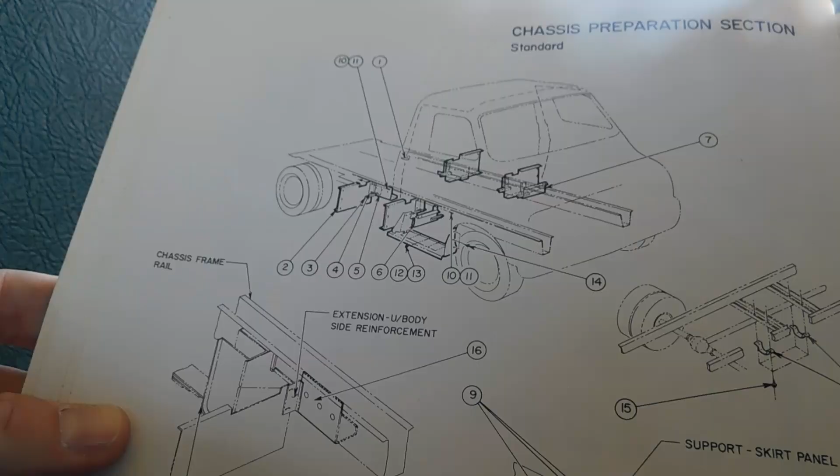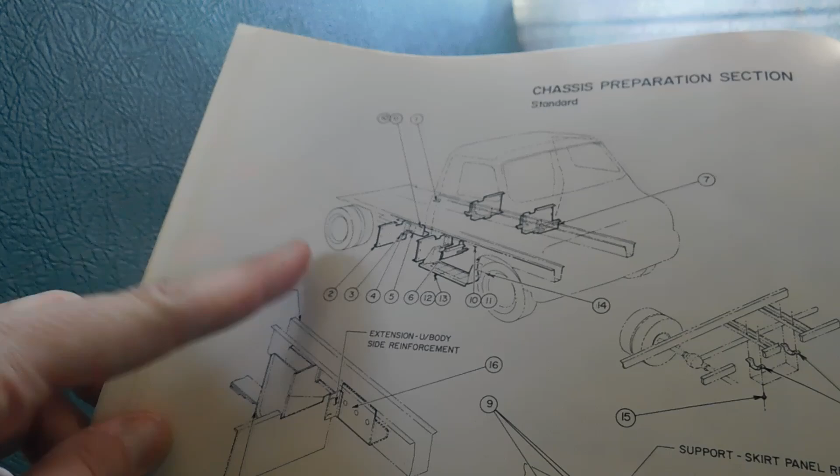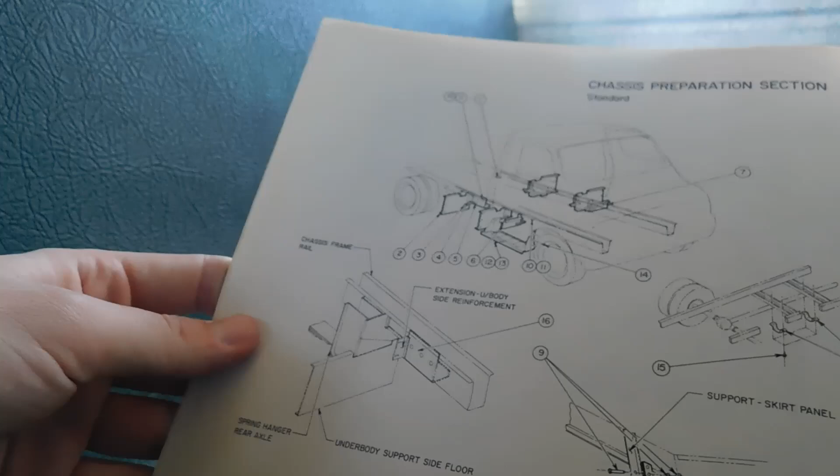So the first thing we're going to look at here is a diagram for the chassis preparation section. So this is just showing you the actual van chassis. You can see right here, this is the entire van chassis, and it's showing you the different points of the chassis.

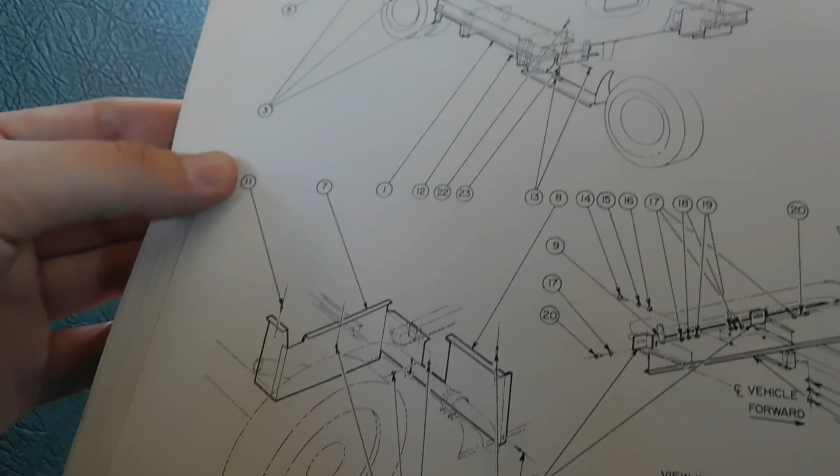And stuff that needed to be done to get it ready to mount the body. Then if we flip the page, we've got an underbody panels and heat shield section. So this is kind of cool, just another shot of the chassis and the different parts of it to show, since it's a parts book.

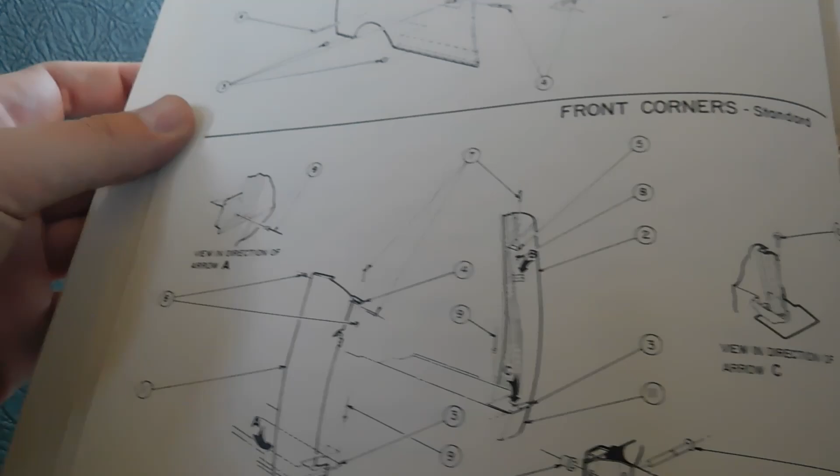Next, we've got a side panel view. So these are the side panels of the bus. And then we've got the front corners of the body, as you can see there. Then we have the rear end section right here. So it looks like this rear end section doesn't have windows.

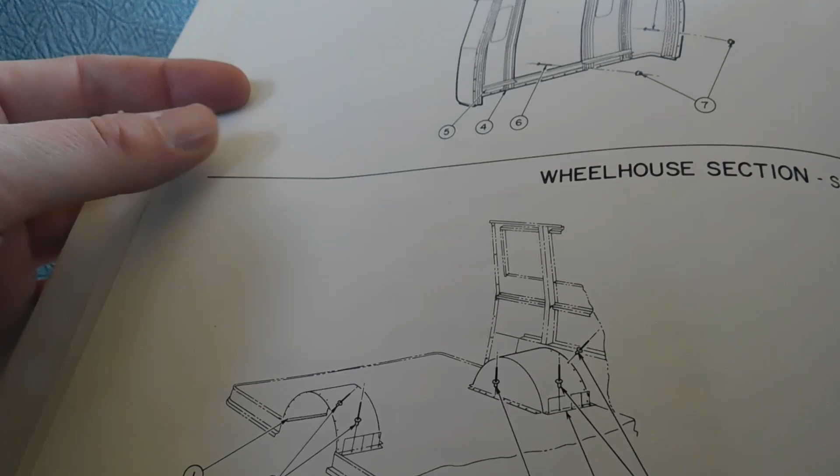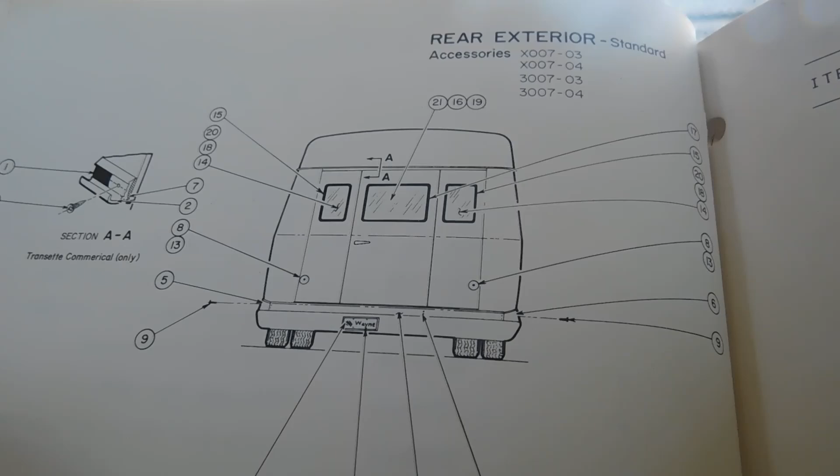That's your view of the rear end section. Underneath, we've got the wheelhouse section of the body. And then we've got the rear exterior. So there's your exterior shot of the back of a Busette. And then we've got the rear interior shot of the Busette.

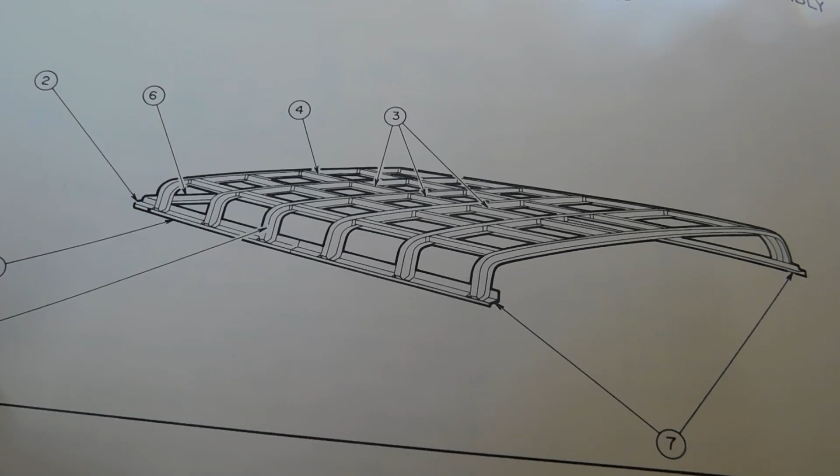Right here, we've got the roof frame assembly. So there's your look at what the Busette roof frame would have looked like. And then, let's see, roof assembly continued. This is just showing you the caps and the topping sheets for the roof assembly, and how they would go together.

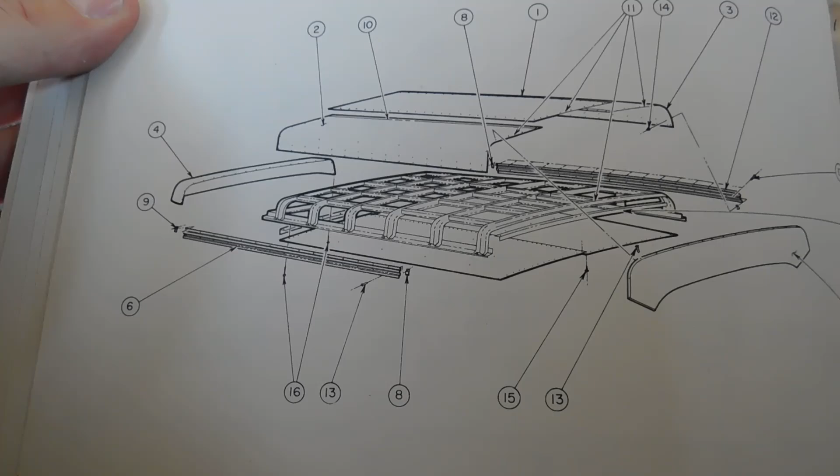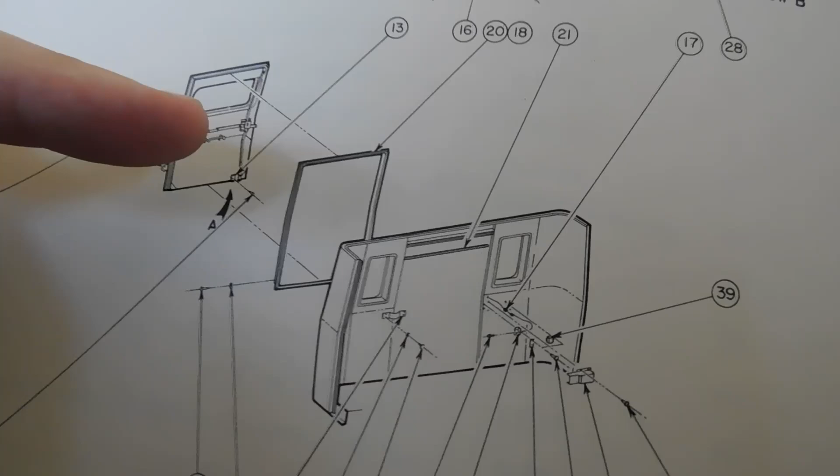Next, we've got a door. So this would be the single rear door, because you get an option as a single door or a double door. So there's your single rear door. Then we've got just continuation of the diagrams of the doors and how they would go together. There's your look at the door frame, and then the back of the bus.

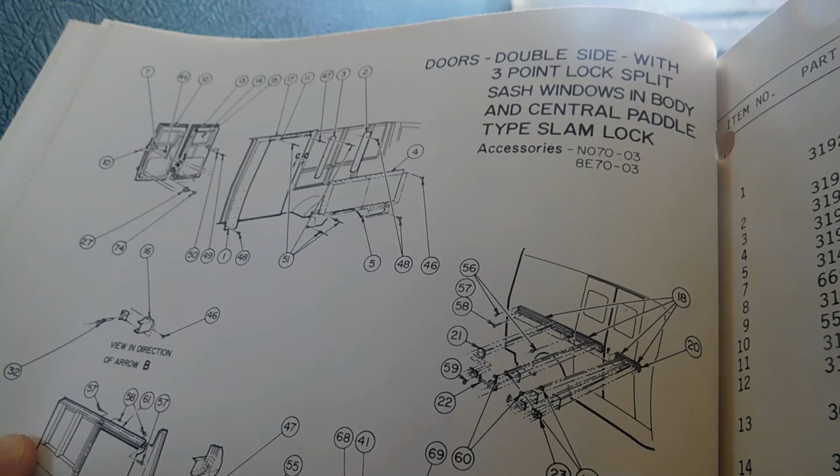So this one's kind of interesting. You've got the double side, let's see, 3-point lock split sash windows in body and central paddle type slam lock. That was a mouthful.

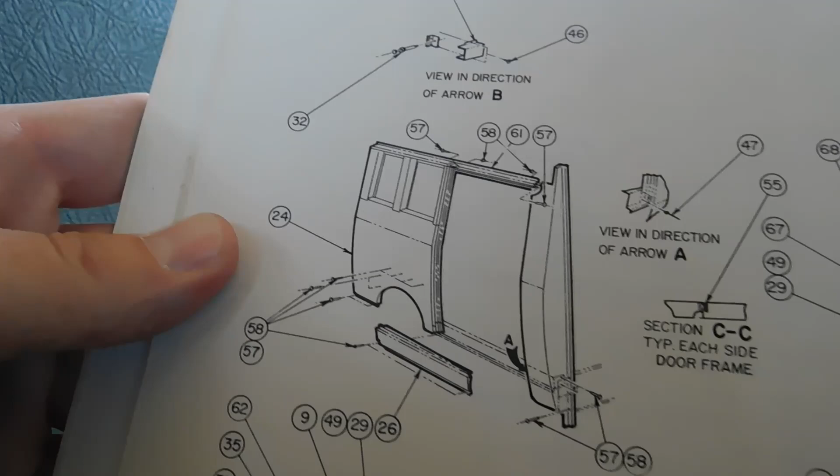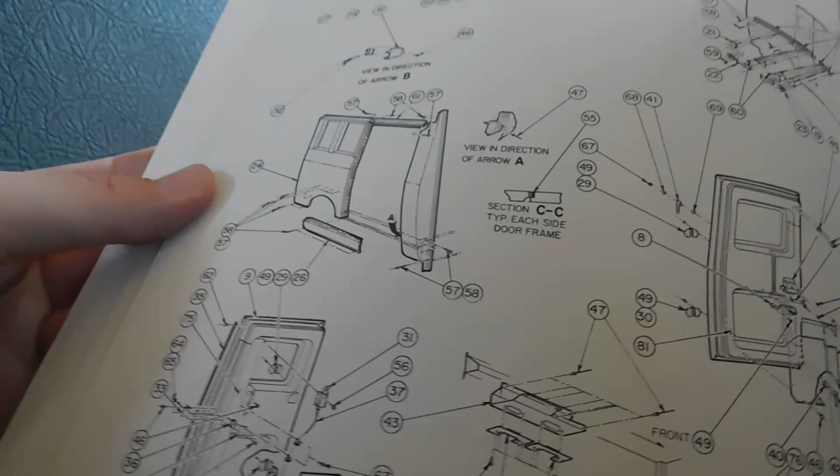But you got your double door diagram. There's the side body of the bus, and this would be for like a lift door. So there's your side panel, there's your lift opening for the doors, there's your look at the door mechanisms.

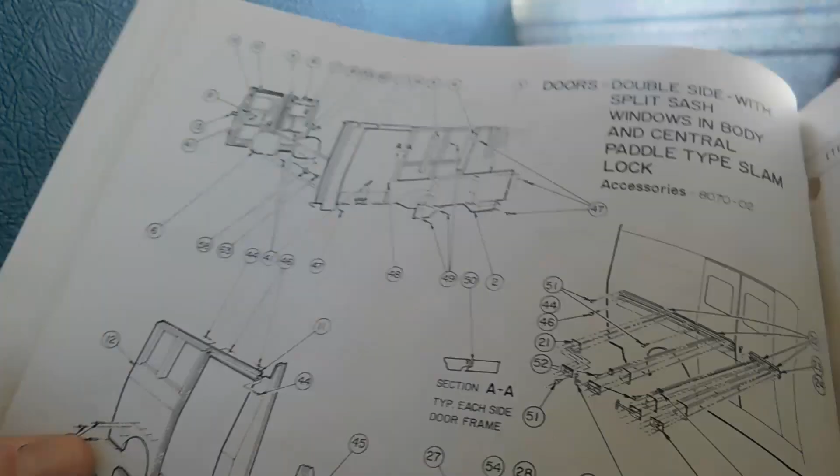That probably is a rear door, it's got what looks to be 2 windows, but this is probably a side door for the wheelchair lift. And this is just another option for the side of the bus. I think this is a singular door instead of 2, or it's a variation of the double doors for the wheelchair lift.

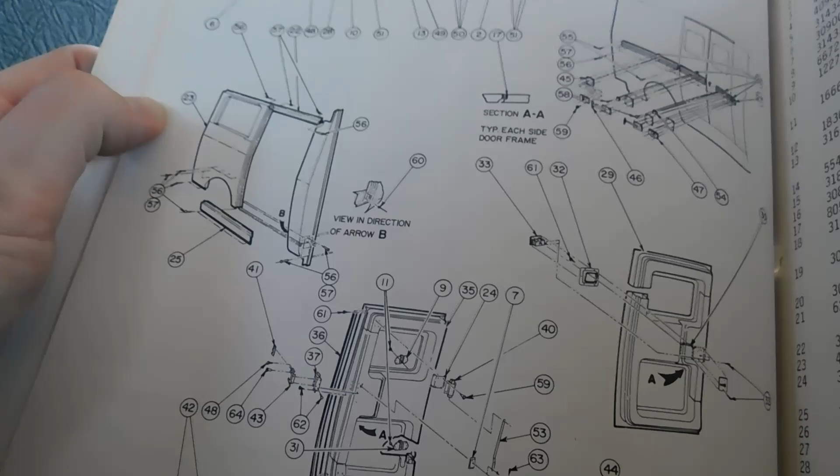And this is another page of the side double doors. Looks like this is a different body setup though, so that's a little bit different. But yeah, that's 3 versions of that. Next we've got an exterior shot of a Busette.

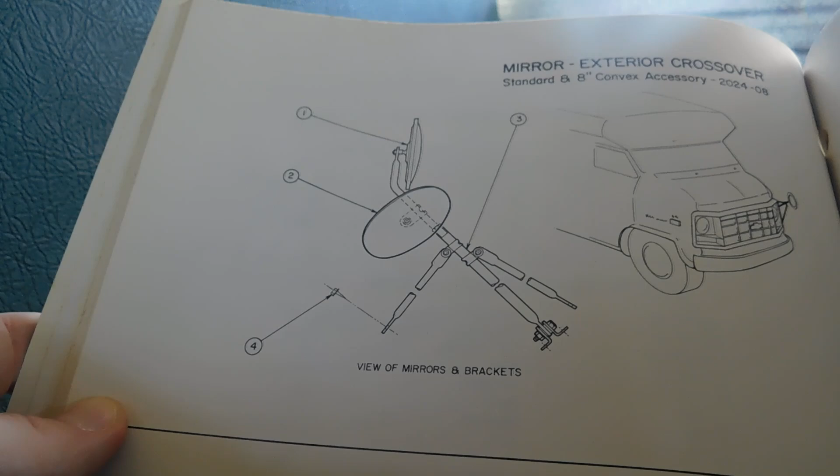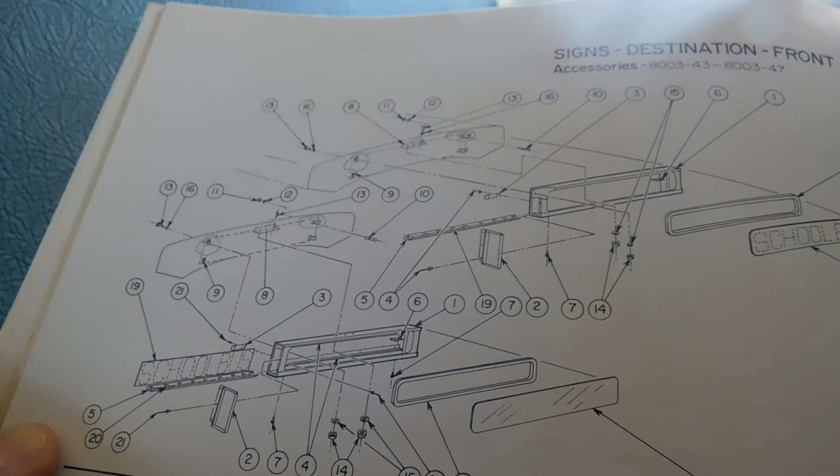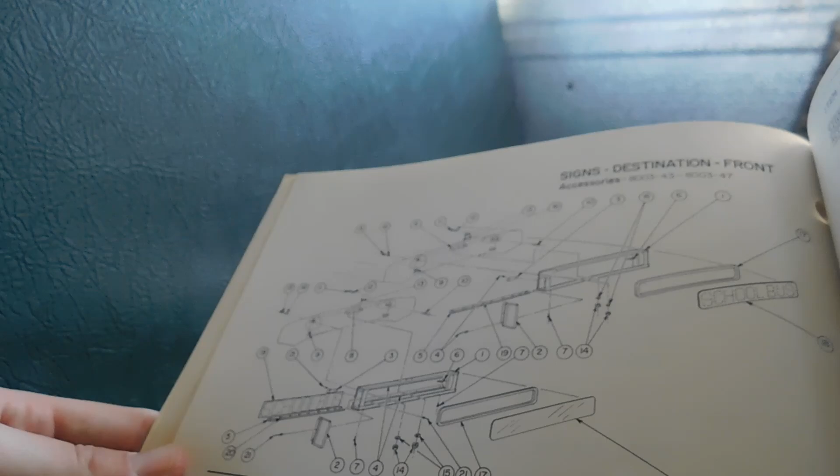So next we got a diagram for an exterior mirror crossover, and then a sign flip type front and rear. Continuing with the destination sign, this is a destination sign for the front, showing you a lighted sign setup, so that's pretty cool. And then we have a lighted destination sign for the rear with that same setup diagram, so that's awesome.

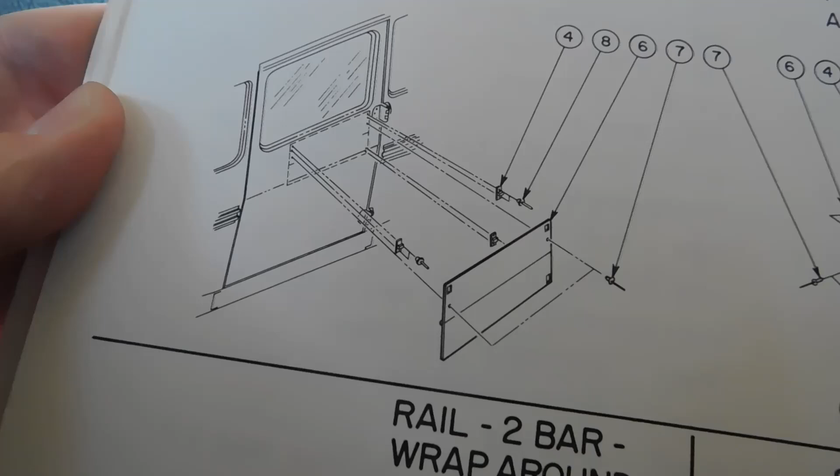So next is an out of service sign for the front and rear, which is pretty cool. You can see there how it would mount to the back of the bus, and then how it would mount to the front. I don't think I've ever seen something like that before, so that's a pretty cool thing you could have got.

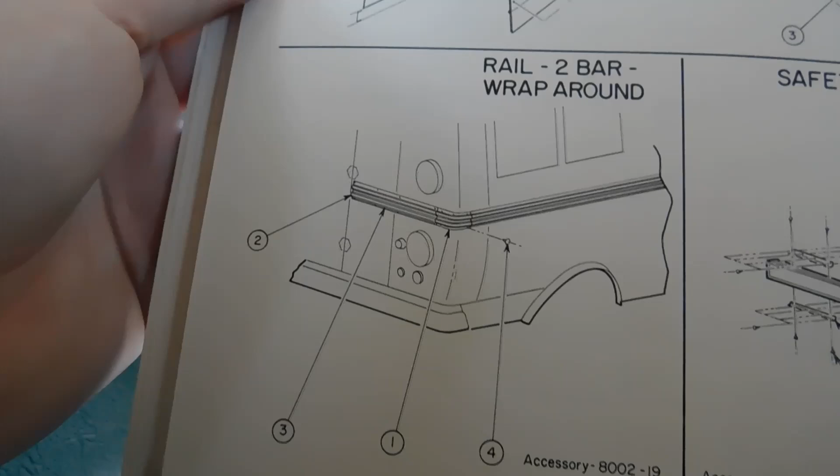So then you've got your wraparound rub rail, and then the safety backing system, which I would assume, it kind of looks to me like a backing sign.

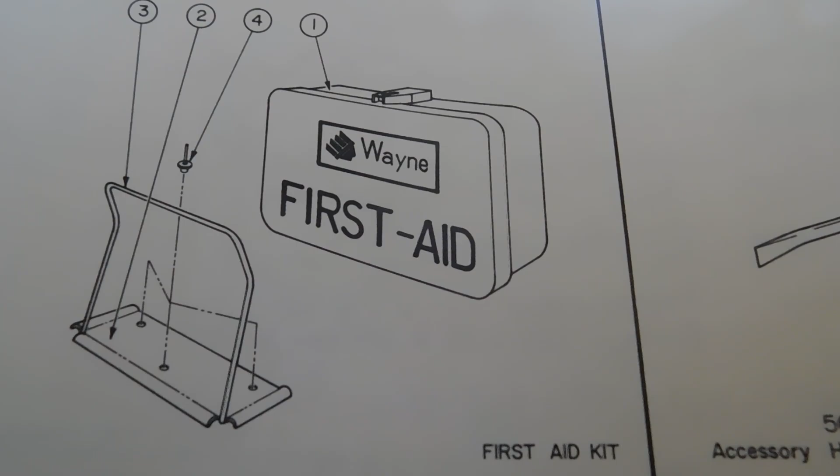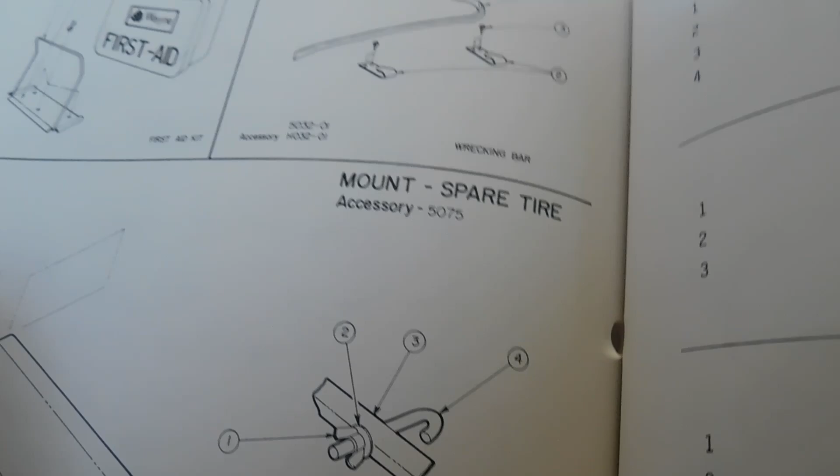Next you've got your safety equipment, and I wanted to show this because it's got a picture of a Wayne first aid kit, which is pretty cool. There's a crowbar, and then you've got your spare tire mount. So there's a spare tire mount option that you could have gotten on a Busette.

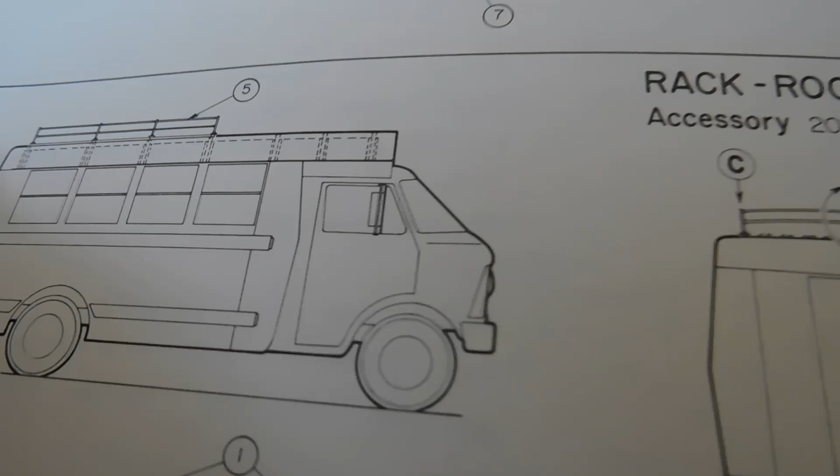Next you've got ladder luggage, which would have been an option you could have got. There's your side view, your rear view of the ladder for rooftop luggage, and then there's your view of the bus with the rooftop luggage on it. That's pretty cool because this Busette looks to have I would say a Ford front end, or possibly a Dodge, but it kind of looks like an older Ford Econoline to me.

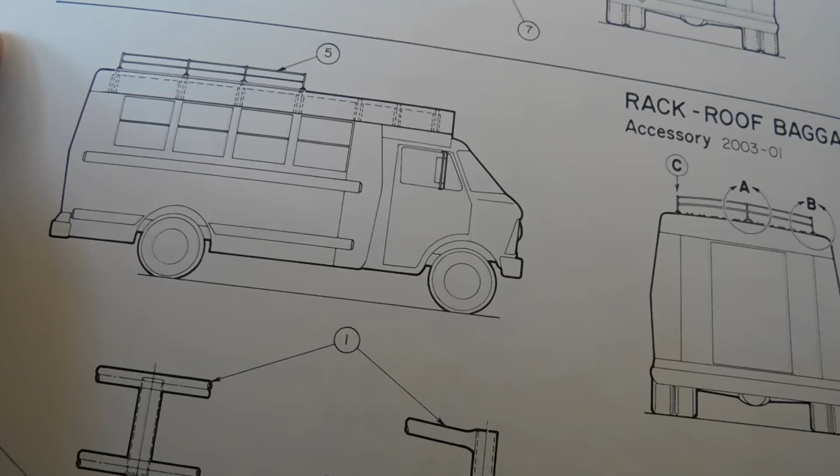So that's a pretty cool little diagram there. And then there's your back view of the rack roof baggage. So the top part was for the ladder, and then this part was for the actual roof luggage. So that's pretty cool to see.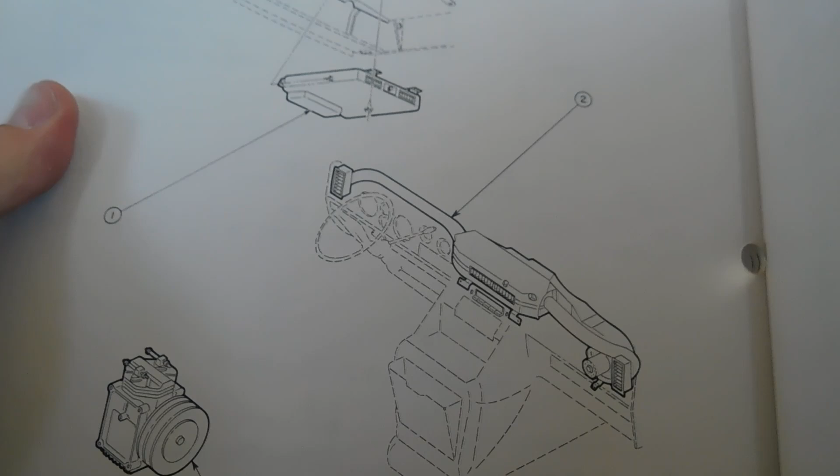So this is a diagram for an air conditioner assembly. That's interesting, you really didn't see a lot of air conditioning options back then, but I assume that was probably for more of like a city bus, or if there was a retirement home or something like that. That's probably something they would have ordered on that bus.

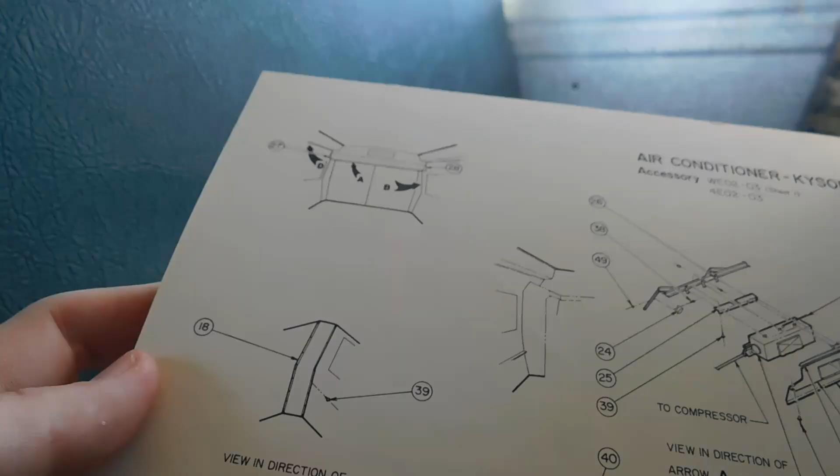Here's additional diagrams for the air conditioning system for parts, so that's pretty cool. Here's the AC guard for the roof. Let's see, heater under seat.